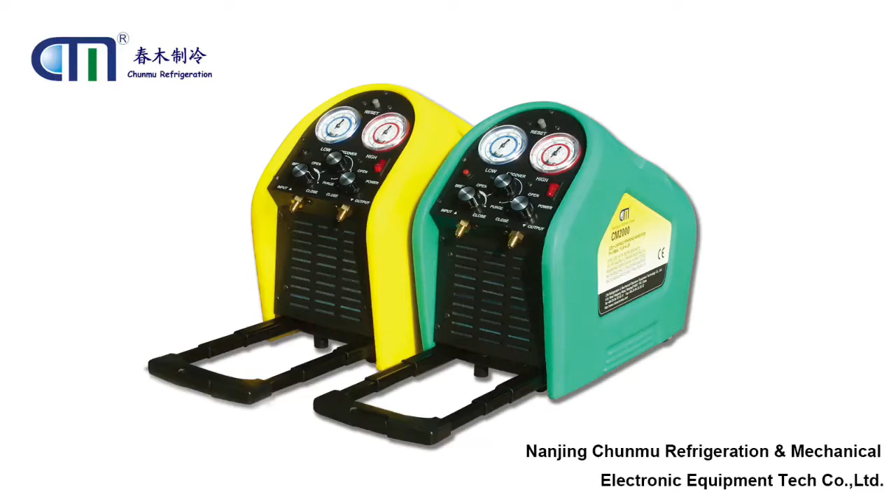First, let's have a look at the appearance of the machine. The upper handle and bottom pull rod design is very convenient for taking out.

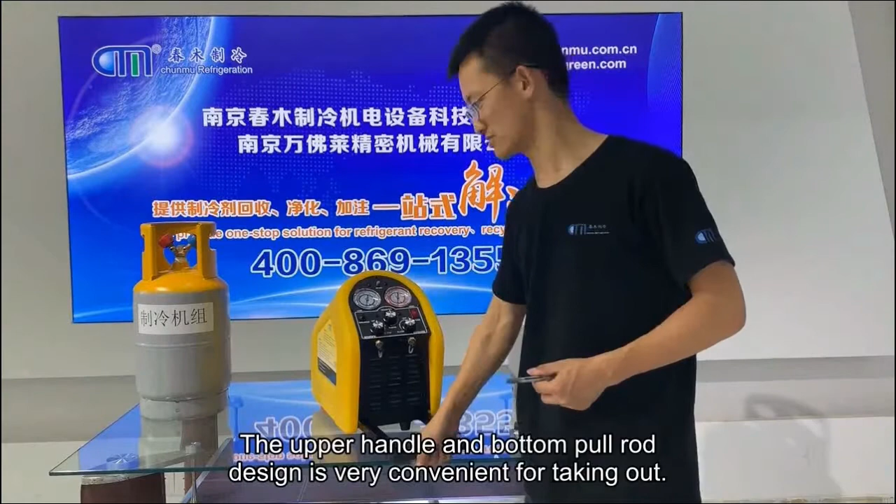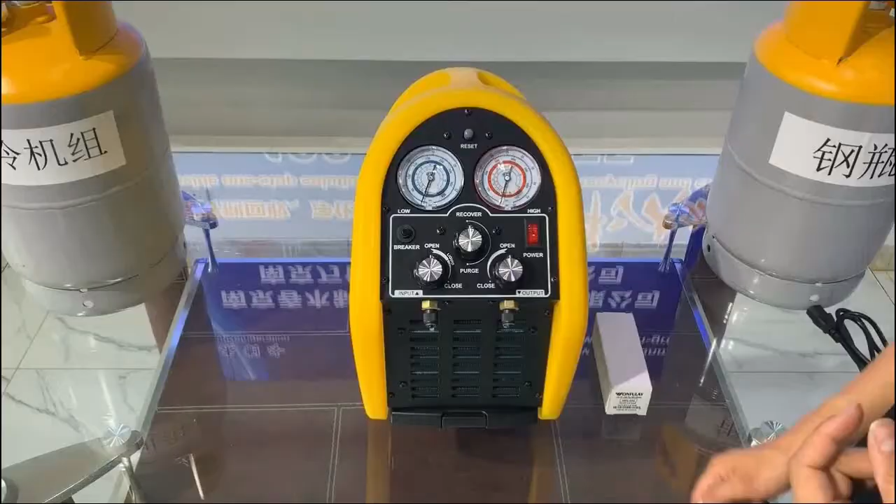Next, I will talk about the function of the dashboard. Take a look at the operation panel of the machine.

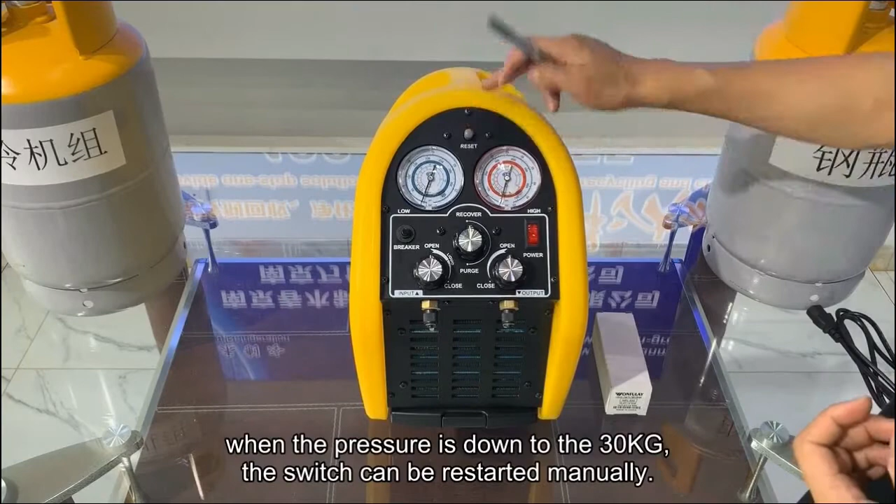From top to bottom, the first one is pressure protection switch, and its factory setting is at 38 kg. When the pressure is down to 30 kg, the switch can be restarted manually. Generally, this switch is to protect the exhaust outlet of the recovery machine and cylinder from high pressure.

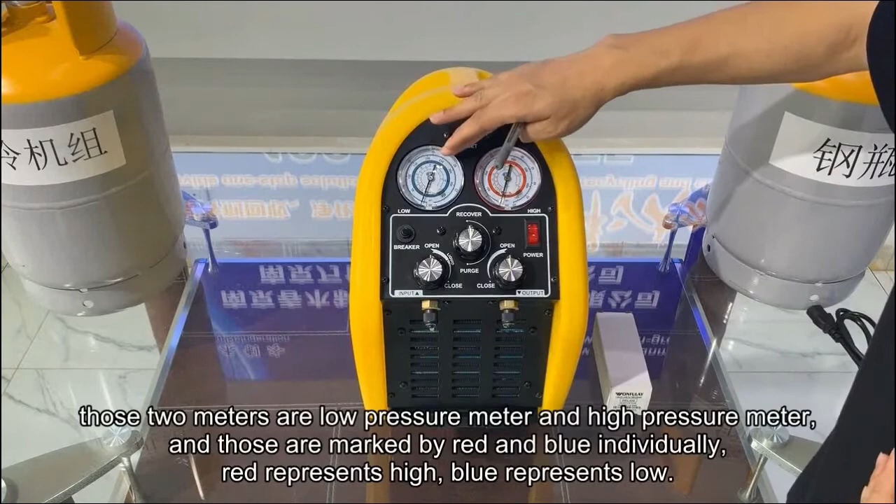Those two meters are low pressure meter and high pressure meter, marked by red and blue individually. Red represents high, blue represents low.

Then looking down, this is the electricity stream protection. There are three valves at the side. The inlet valve and outlet valve are commonly used. The one at left is inlet, and the right one is outlet. The one in the middle is the self-purge switch.

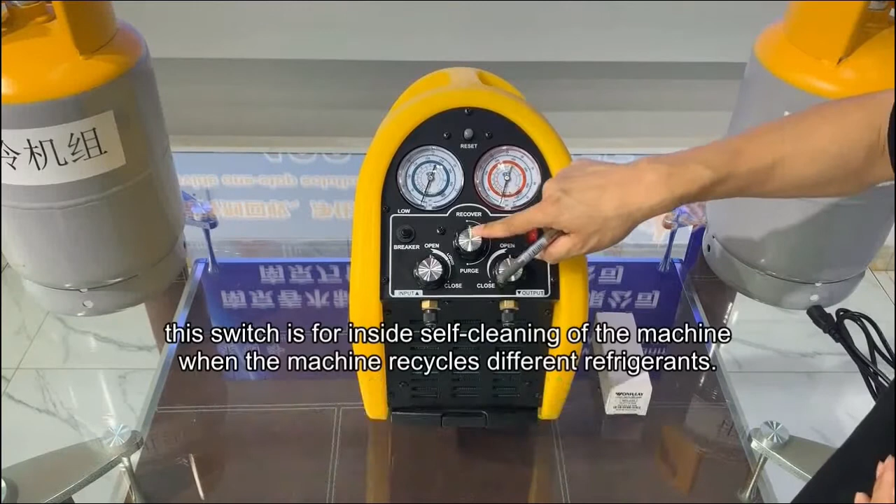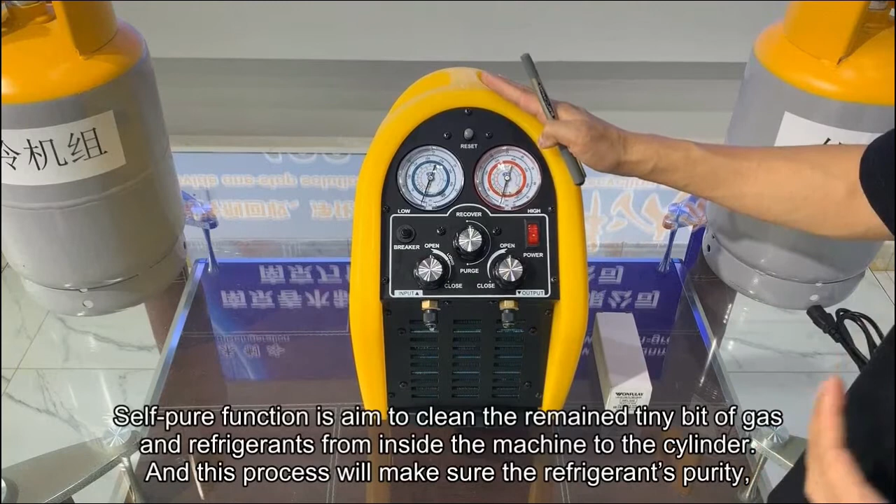This switch is for internal self-cleaning of the machine when it recycles different refrigerants. The self-purge function is aimed to clean the remaining tiny bit of gas and refrigerants from inside the machine to the cylinder, and this process helps ensure the refrigerant's purity.

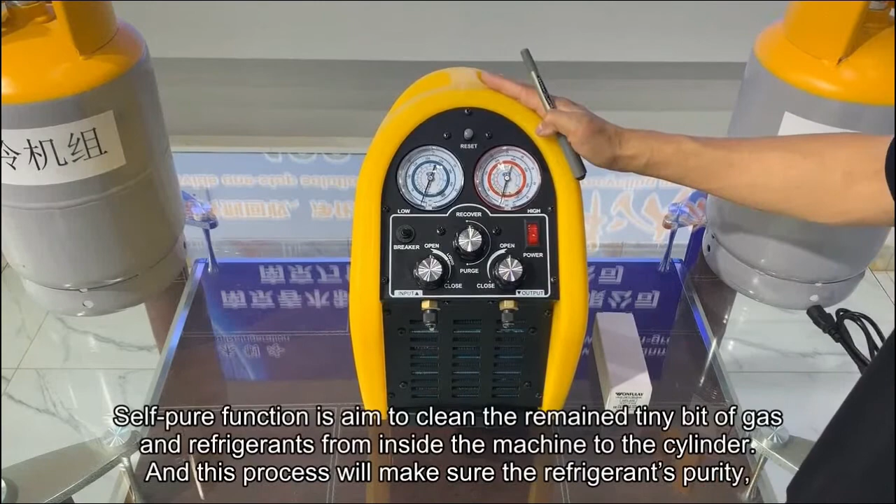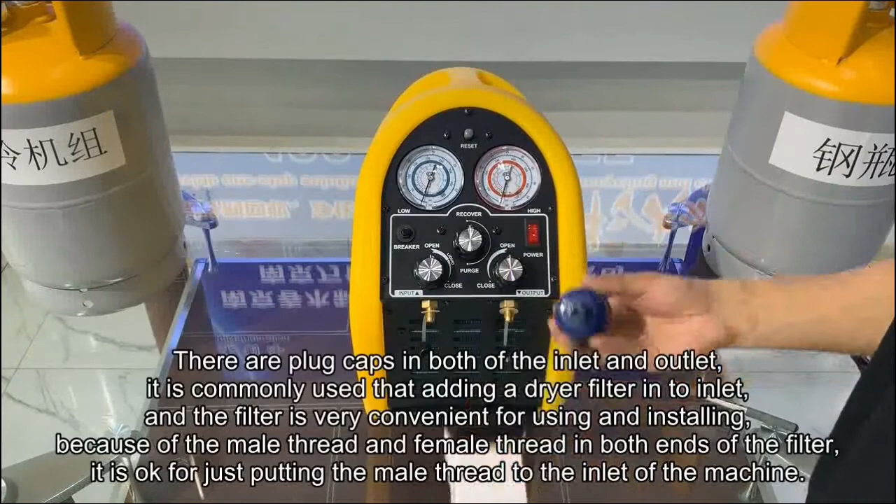There are plug caps on both the inlet and outlet. It is commonly used when adding a dryer filter into the inlet, and the filter is very convenient for using and installing. Because of the male thread and female thread on both ends of the filter, it is okay to just put the male thread into the inlet of the machine.

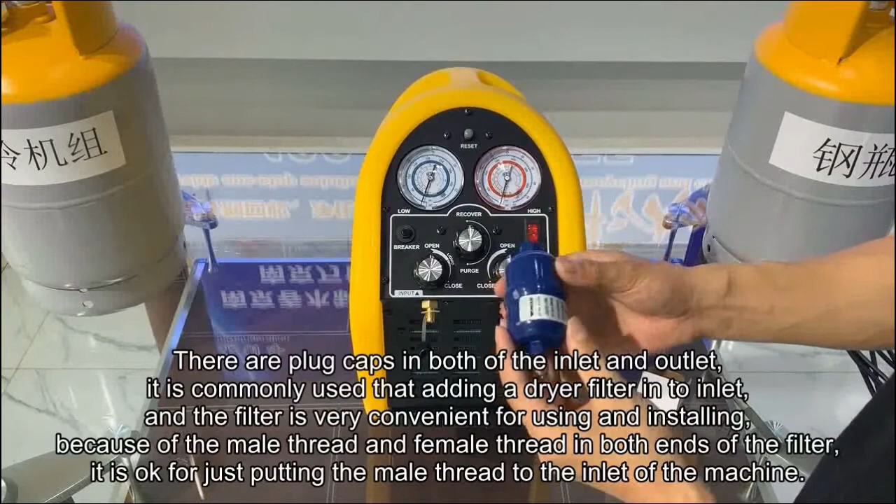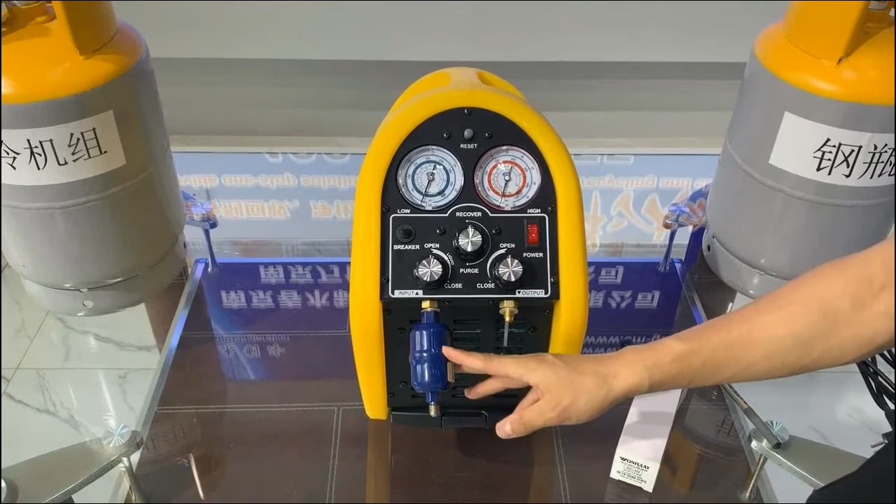We suggest that this dryer filter needs to be changed every 3 months, and it is very easy to operate and change. The main function is to clean the moisture and impurities out of the recovery machine.

The pull rod can be collected into the machine, and just lifted.

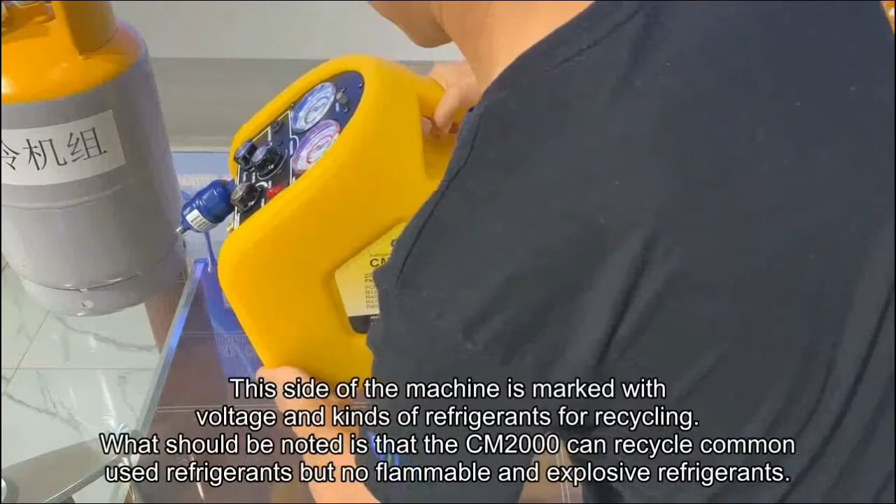This side of the machine is marked with voltage and kinds of refrigerants for recycling. What should be noted is that the CM2000 can recycle commonly used refrigerants, but not flammable and explosive refrigerants.

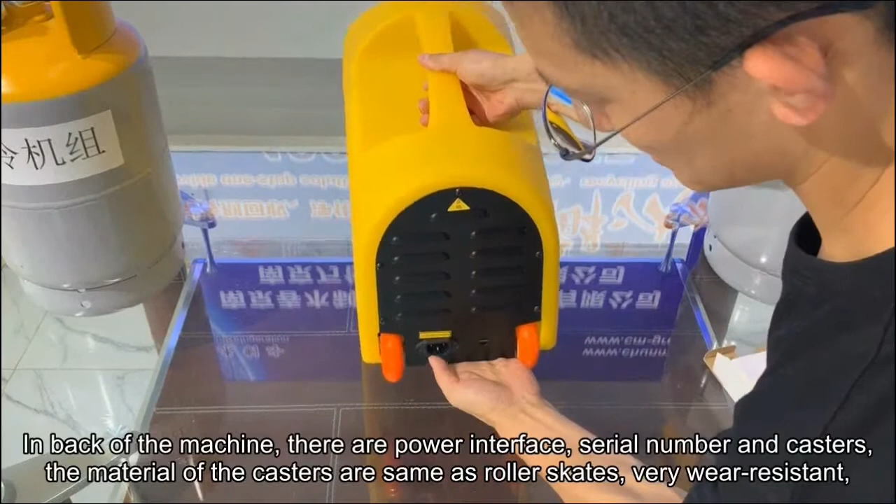In the back of the machine, there are a power interface, serial number, and casters. The material of the casters is the same as roller skates, very wear resistant.

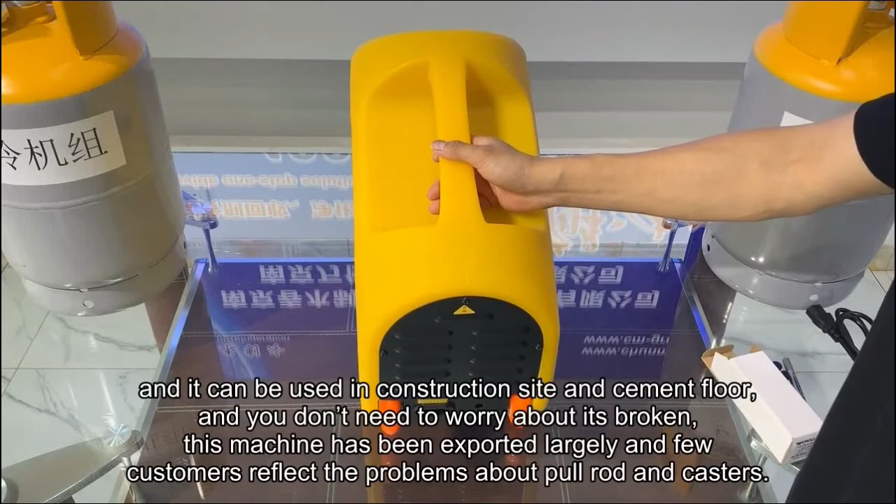It can be used on construction sites and cement floors, and you don't need to worry about it breaking. This machine has been exported largely, and few customers have reported problems about the pull rod and casters.

The other side of the machine is marked with points needing attention.

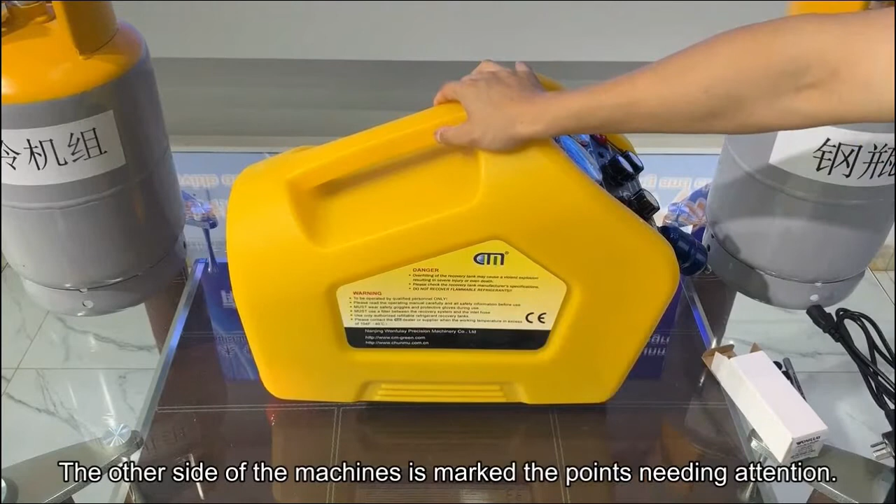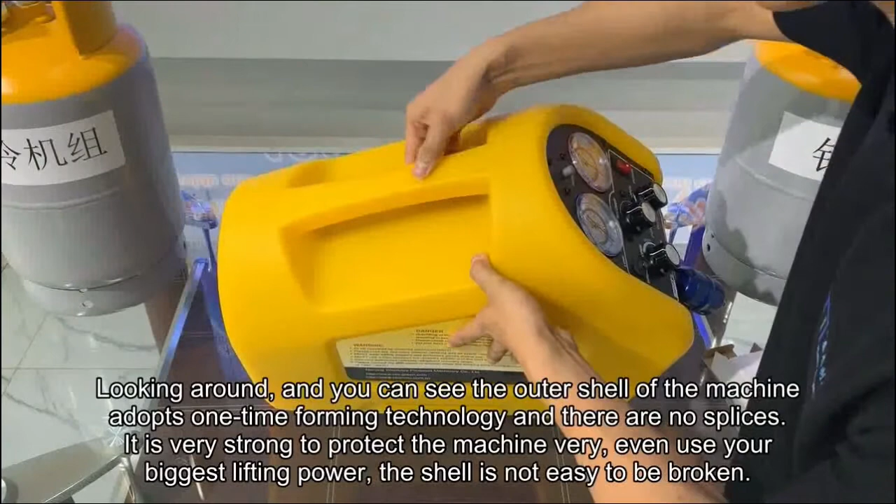Looking around, you can see the outer shell of the machine adopts one-time forming technology and there are no splices. It is very strong to protect the machine; even lifting with all your biggest power, the shell is not easy to break.

CM2000 has 3 ways of recovery, which are gas, liquid and push-pull.

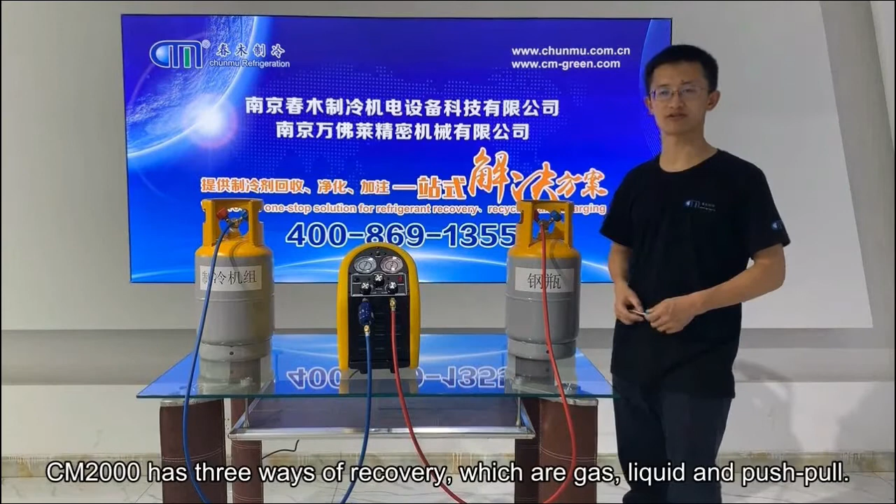The first way is gas recovery. Here we use two cylinders to represent the refrigeration system and recovery cylinder, and to show how the gas recovery works.

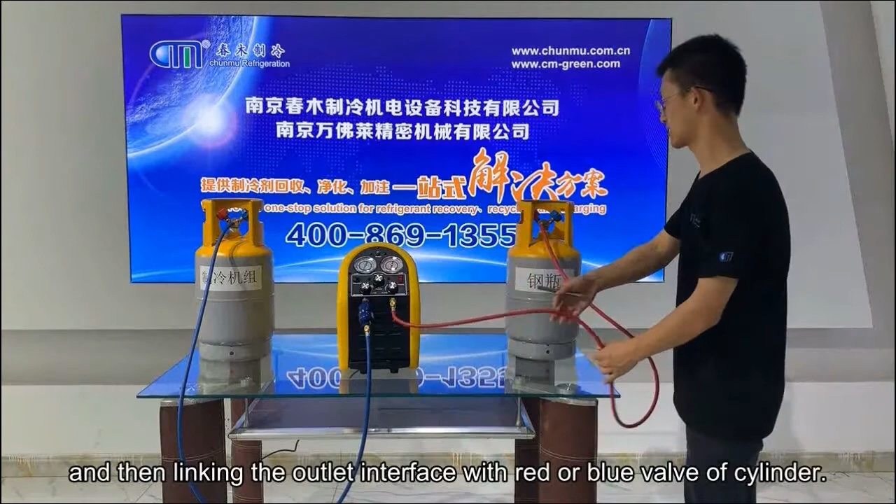By this method, connect the gas or liquid interface of the refrigeration system with the inlet interface of the refrigerant recovery machine, and then link the outlet interface with the red or blue valve of the cylinder.

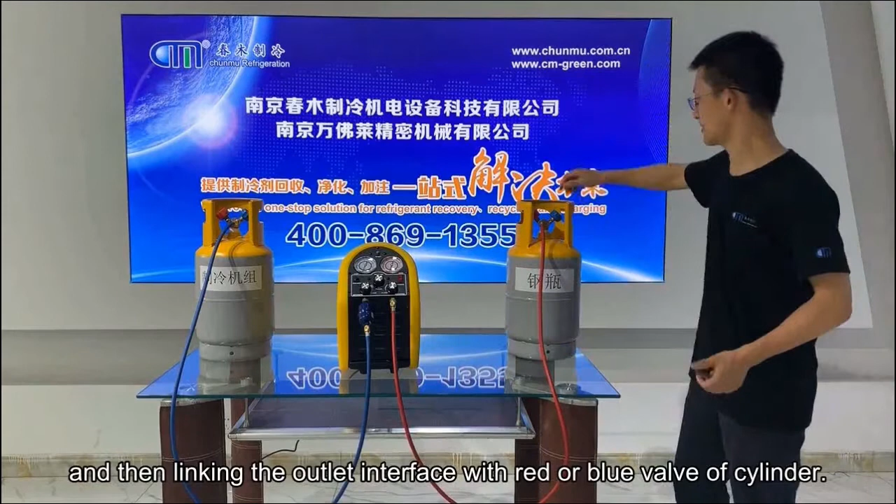We suggest using the red valve of the cylinder, because this is a professional recovery cylinder. The red valve has a copper tube right down near the bottom of the inside of the cylinder. So when air comes into the cylinder, you can use the blue valve to discharge air.

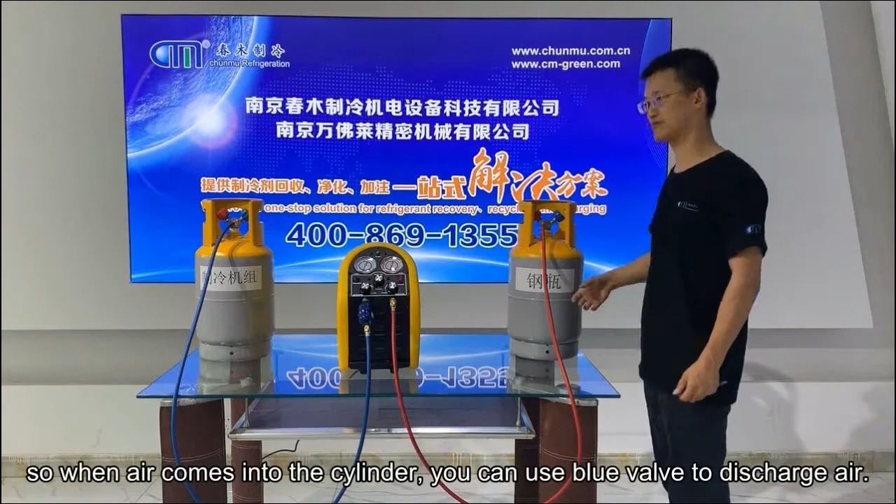Before starting, what should be done in advance is discharging air out of the tube. The specific procedure is opening the refrigeration system valve a little at first to let some air out.

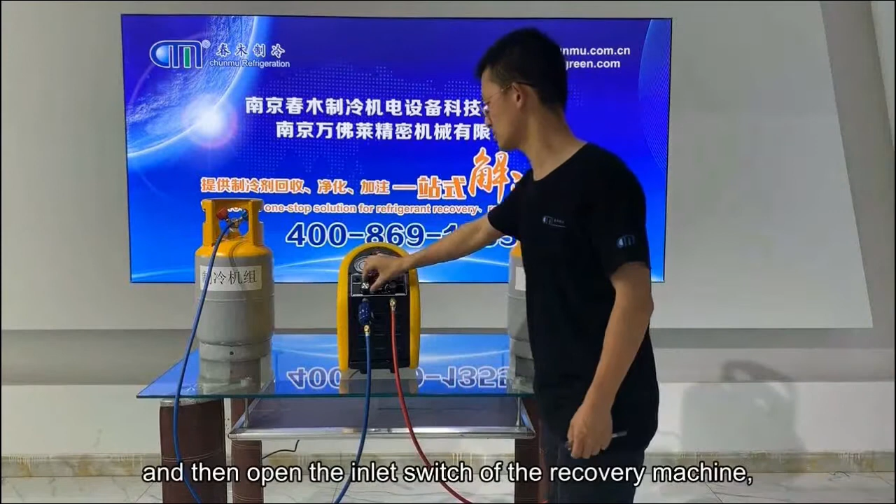Then open the inlet switch of the recovery machine. Open the outlet switch of the refrigerant recovery machine. Next open the switch right in the middle. And open the interface of tube and cylinder a little bit to discharge the tube air.

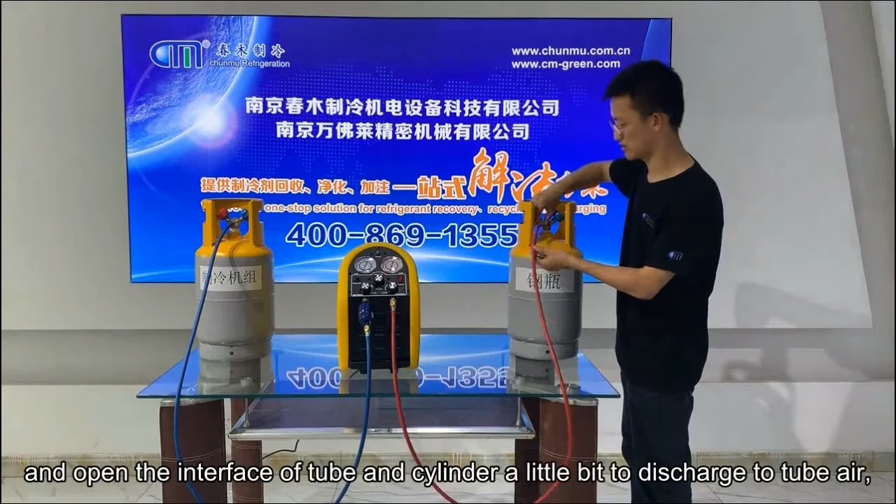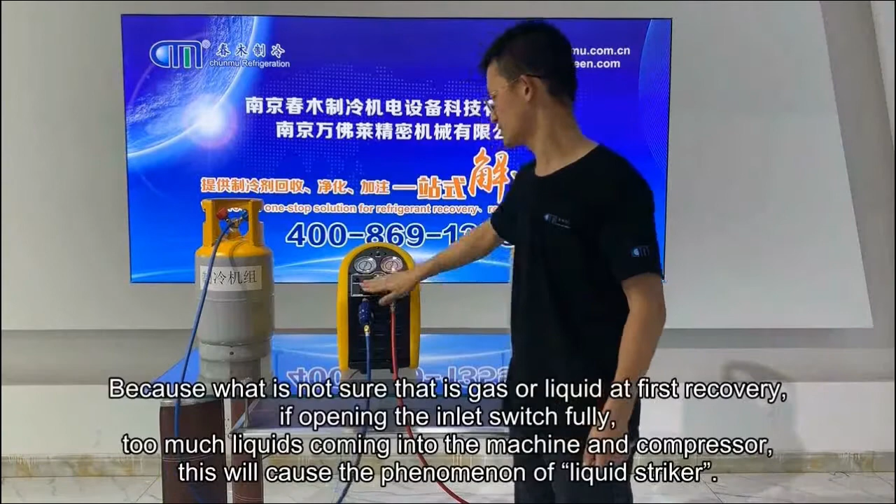Then twist the interface tight. After twisting, we suggest closing the inlet switch first. Open the outlet switch and cylinder valve, to make sure the outlet tube is open. This is because it's not certain whether it's gas or liquid at first recovery. If opening the inlet switch fully, too much liquid will come into the machine and compressor. This will cause the phenomenon of liquid strike.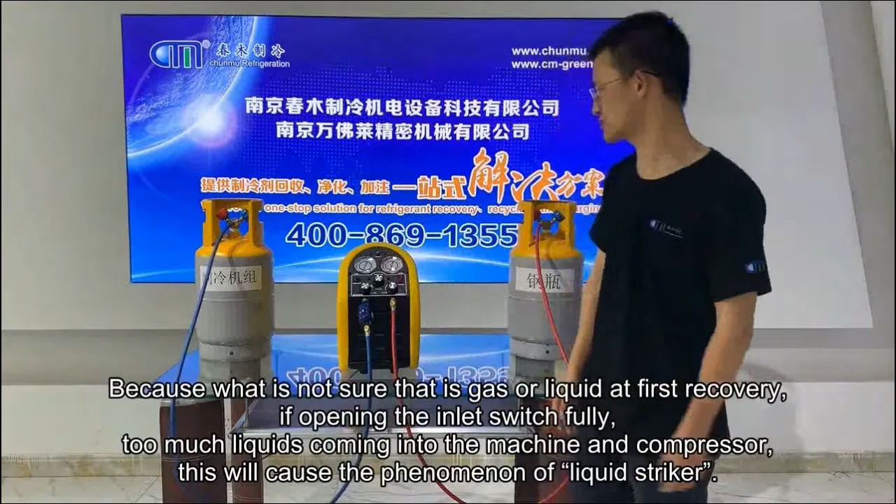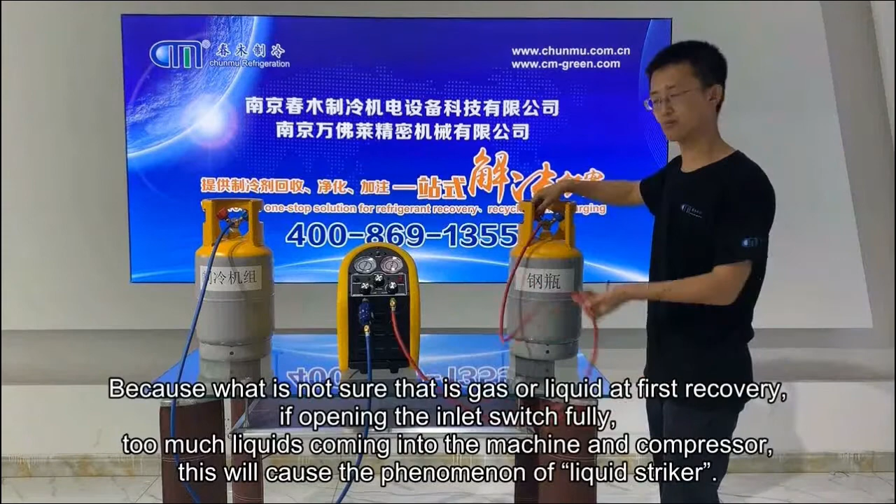After finishing checking all procedures, press the start button, and then open the inlet switch slowly.

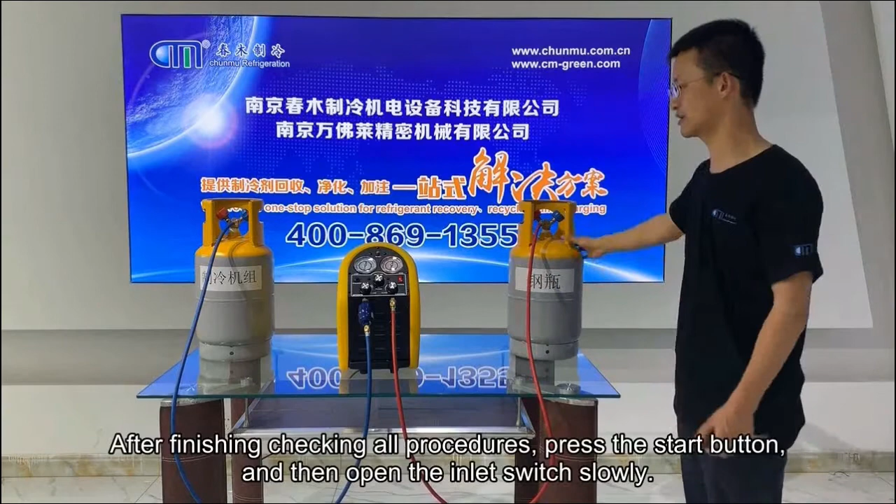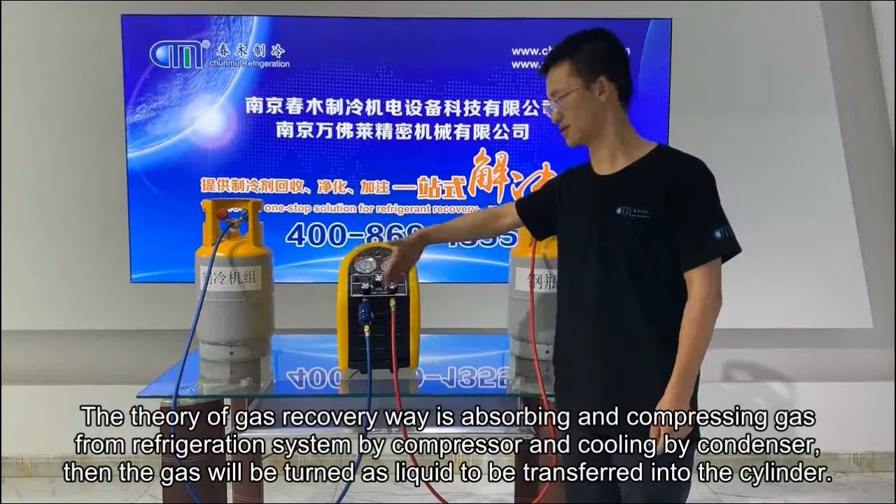The theory of the gas recovery way is absorbing and compressing gas from the refrigeration system by the compressor and cooling by the condenser. Then the gas will be turned into liquid to be transferred into the cylinder.

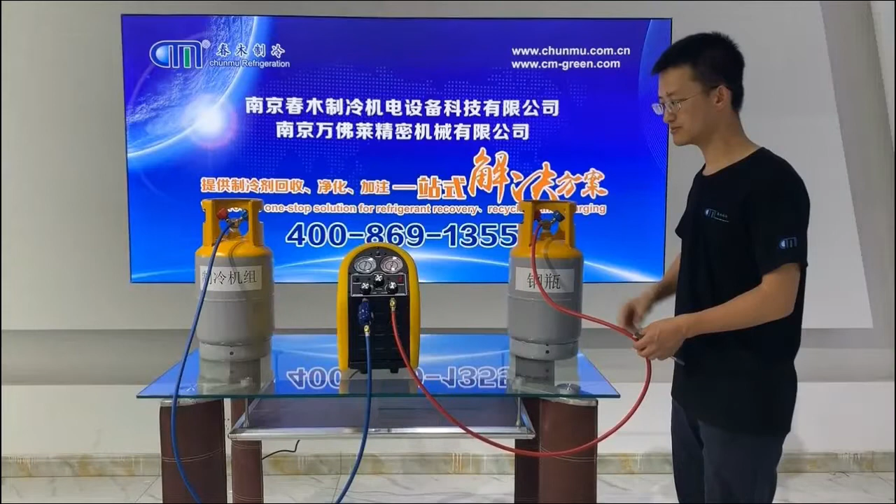The machine setup and tube linking of liquid recovery are just like the way in gas recovery. The difference is what's in the inlet interface is liquid, not gas. Before starting, also need to discharge tube gas.

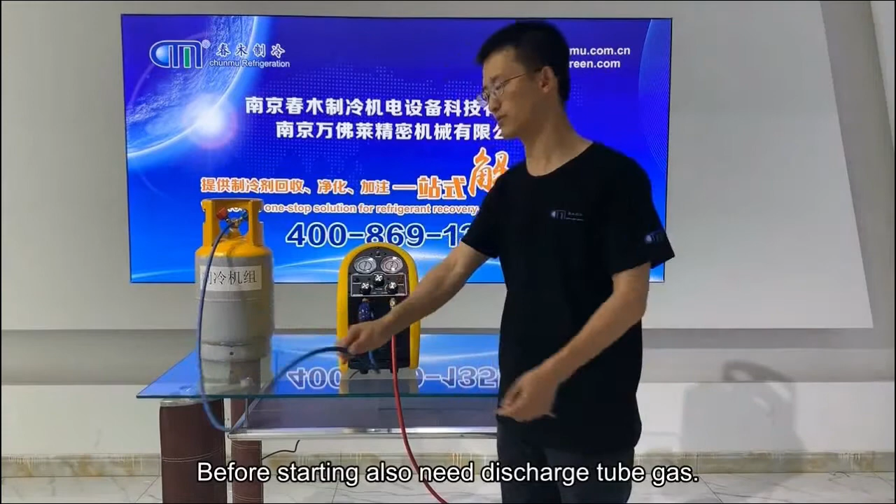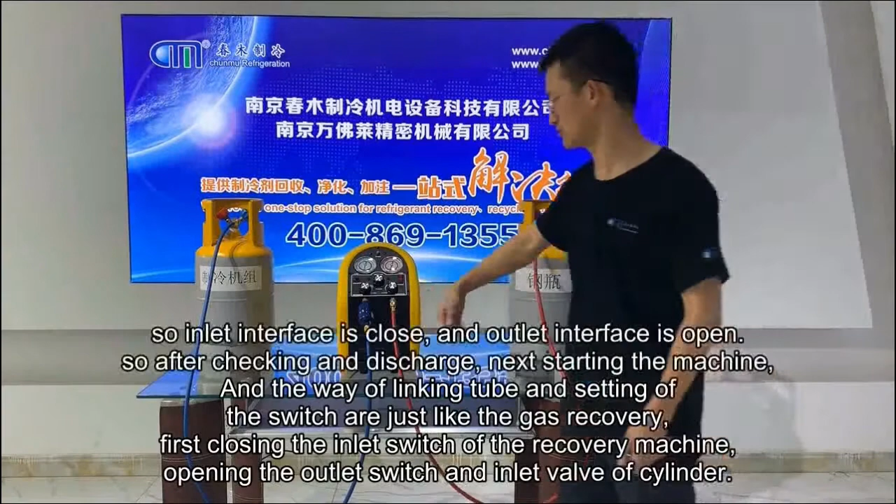The way of linking the tube and setting the switch are just like in gas recovery. First close the inlet switch of the recovery machine. Open the outlet switch and inlet valve of the cylinder. So the inlet interface is closed, and the outlet interface is open.

After checking and discharging, next start the machine, and then twist the inlet switch to the liquid recovery position, which is 45 degrees anti-clockwise. If you open the switch fully, this may also cause the phenomenon of liquid strike. After finishing the recovery of liquid, the inlet switch can be opened fully.

The machine can be closed after the recovery is done. Don't forget to close all the switches and valves of the recovery machine, refrigerant system, and cylinder.

The push-pull way is for a large liquid refrigerant situation, and this is the fastest way in recovering liquid. By this method, it is faster to recycle the liquid first and then recover the gas.

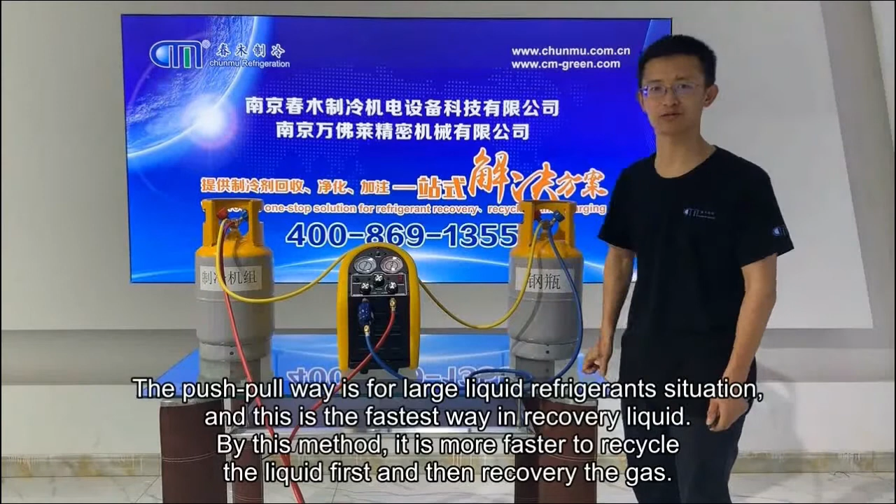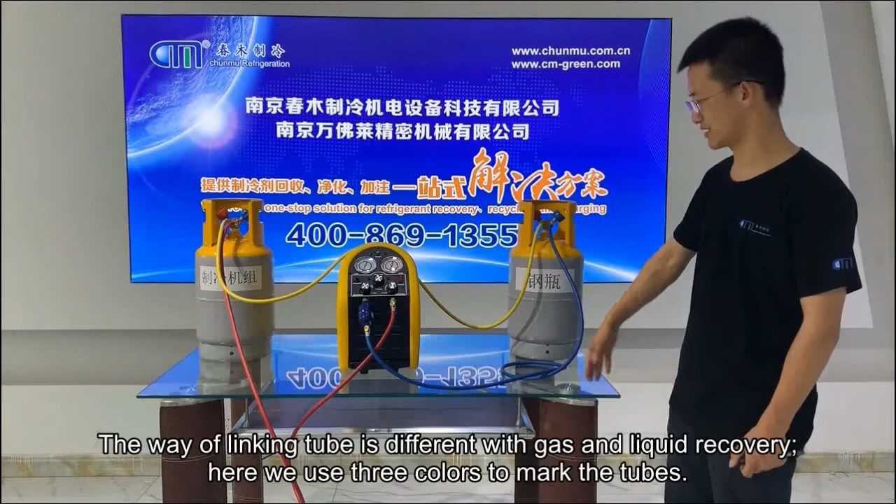The way of linking the tube is different for gas and liquid recovery. Here we use 3 colors to mark the tubes.

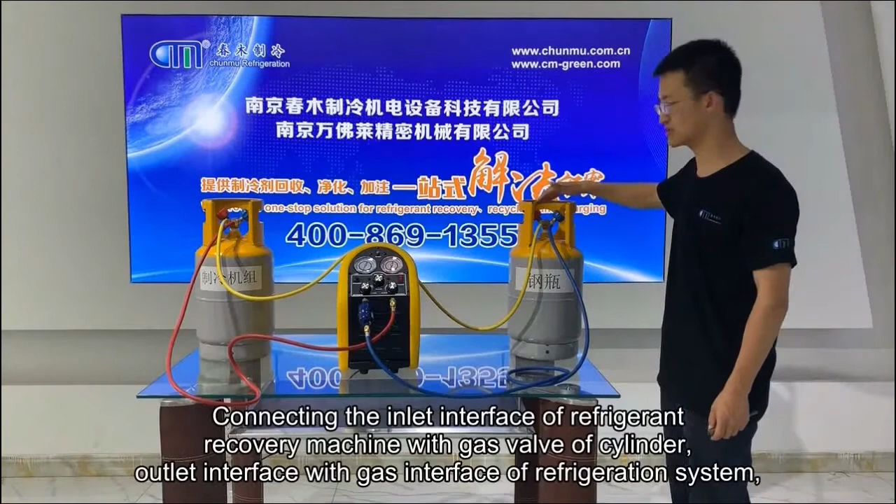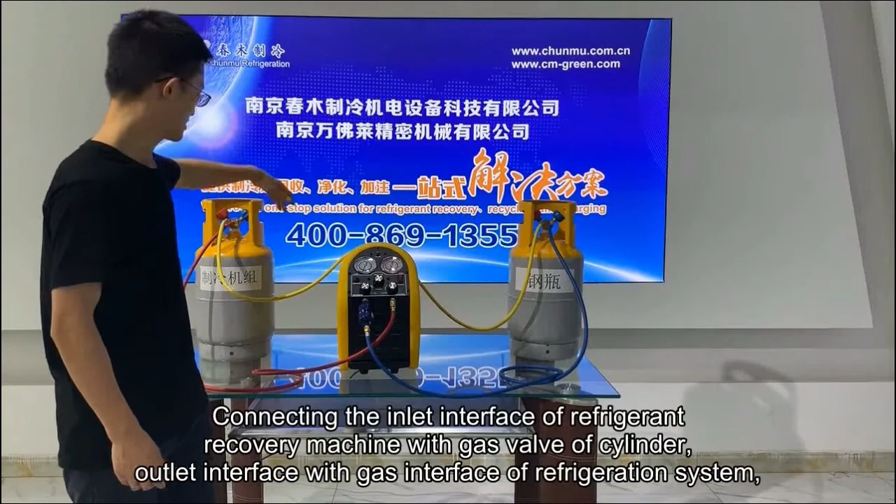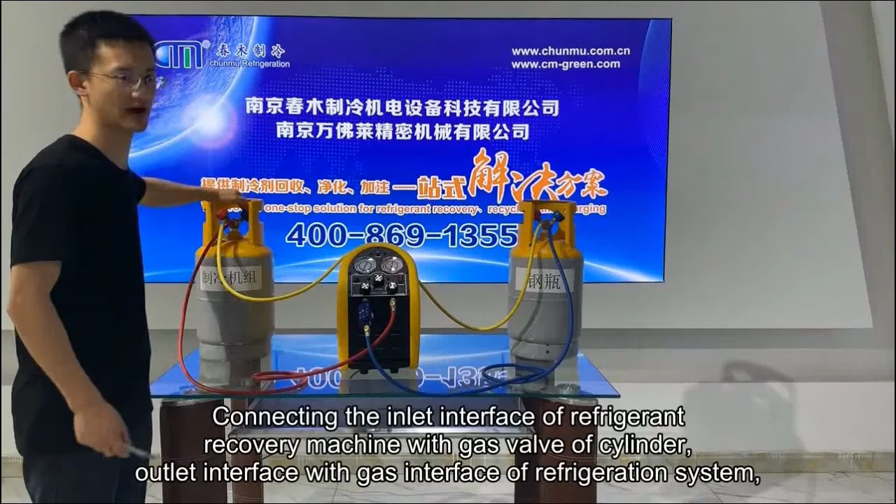Connect the inlet interface of the refrigerant recovery machine with the gas valve of the cylinder. Connect the outlet interface with the gas interface of the refrigeration system. The third tube is to link the liquid valve of the refrigeration system and the cylinder.

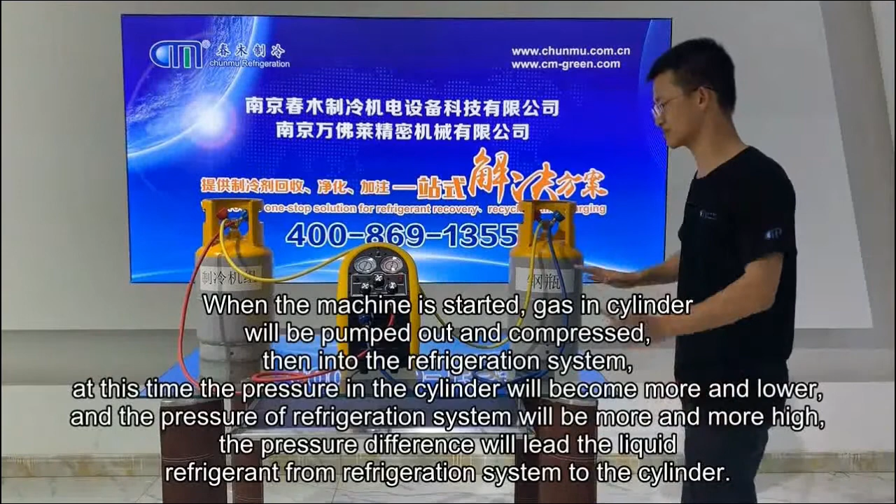When the machine is started, gas from the cylinder will be pumped out and compressed, then sent into the refrigeration system. At this time the pressure in the cylinder will become lower and lower, and the pressure of the refrigeration system will become higher and higher. The pressure difference will lead liquid refrigerant from the refrigeration system to the cylinder.

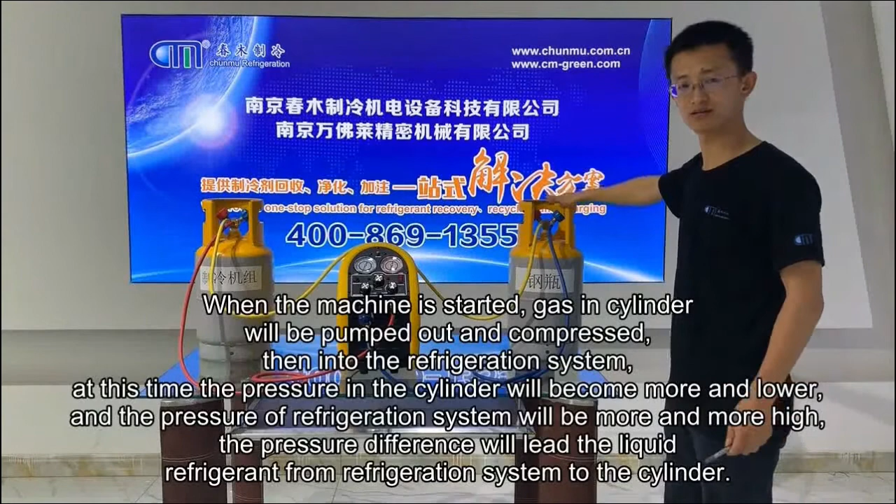This method will help realize fast liquid recovery.

How to use the self-clean function. If the refrigerant recovery machine needs to recover different refrigerants or won't be used for a very long time, the machine needs to be cleaned.

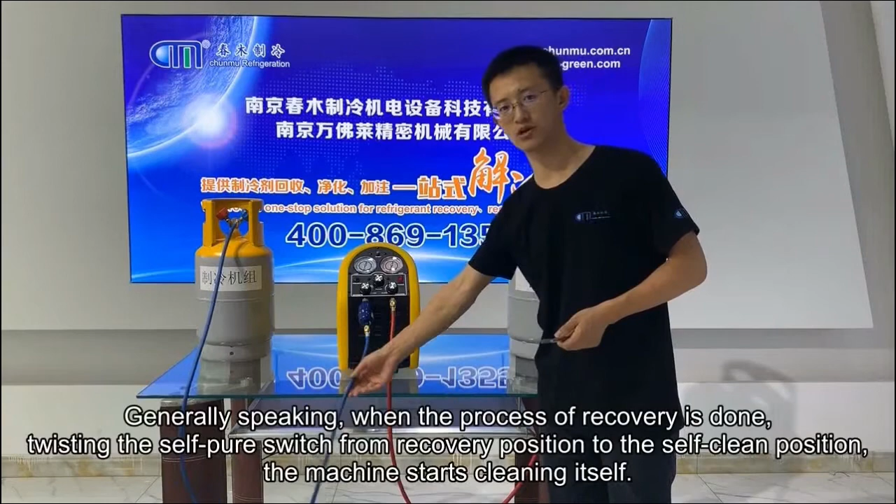Generally speaking, when the process of recovery is done, twist the self-clean switch from the recovery position to the self-clean position, and the machine starts cleaning itself.

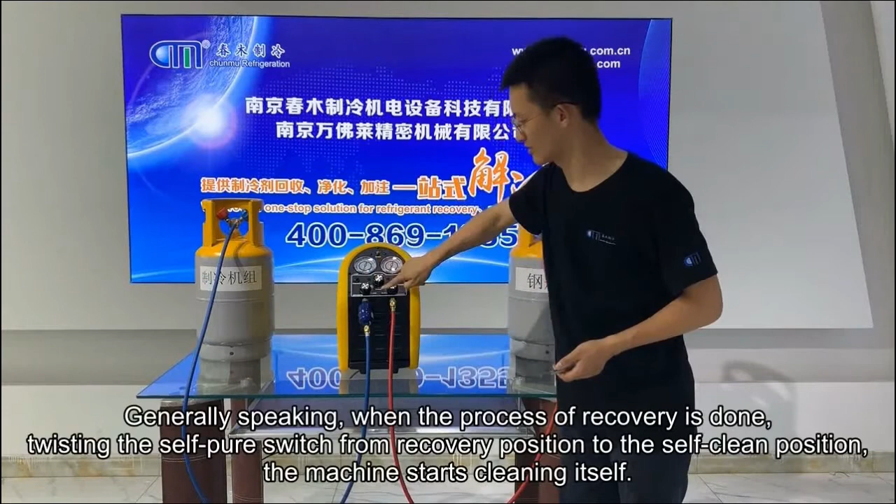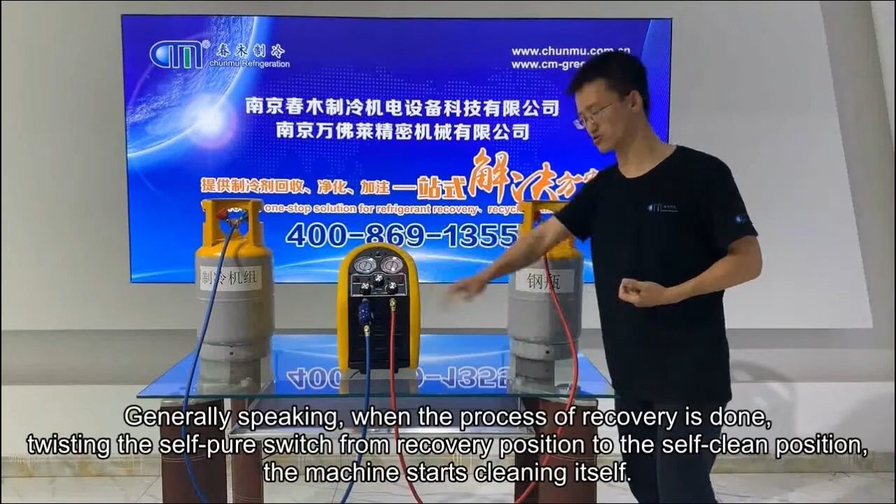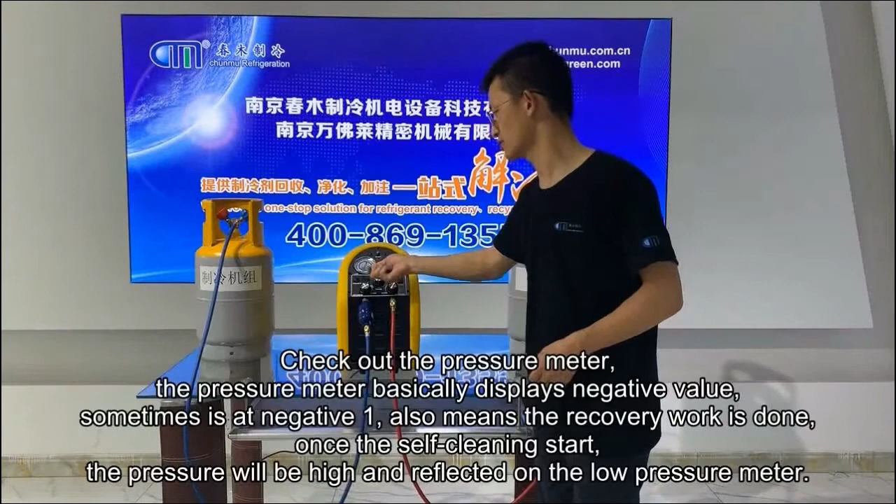But when the recovery procedure is going to end, check out the pressure meter. The pressure meter basically displays a negative value, sometimes at -1, which also means the recovery work is done.

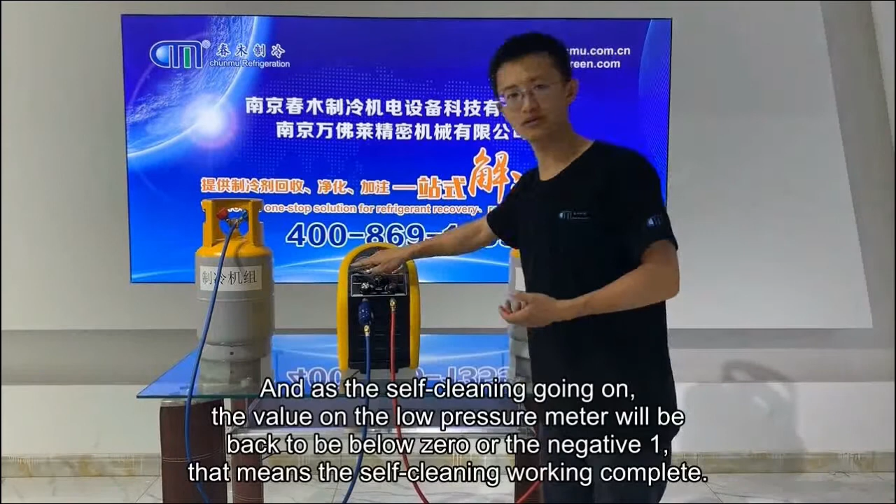Once the self-cleaning starts, the pressure will be high and reflected on the low pressure meter. As the self-cleaning goes on, the value on the low pressure meter will return to below 0, or -1. That means the self-cleaning is complete.